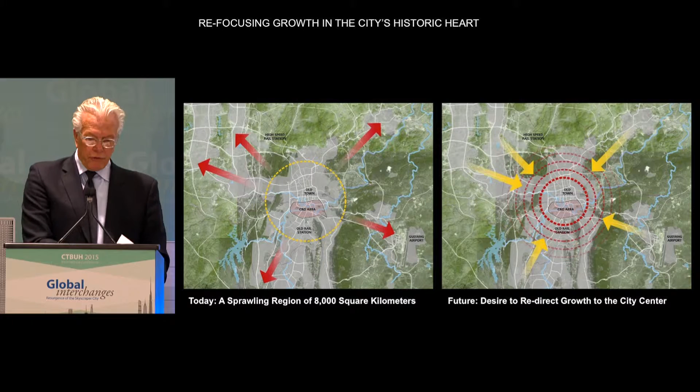As always, we start projects of this size with a set of shared principles as a guide for each decision, to measure success and for future planners that will come.

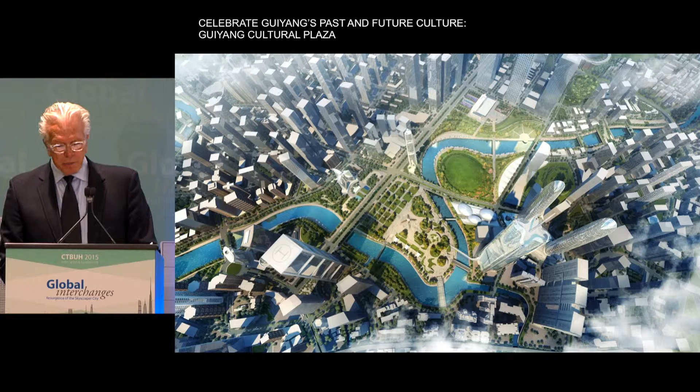The first principle we've used is to celebrate the culture of this place. Guiyang is rich with a cultural legacy that has been preserved for centuries. Our plan proposes to preserve those sites, but also to transform the city center into a cultural center. Across from the recently completed Party Plaza, you see here Cultural Plaza spanning the riverfront in which new iconic buildings have emerged, similar to what Greg has mentioned earlier, as well as the SOM Tower.

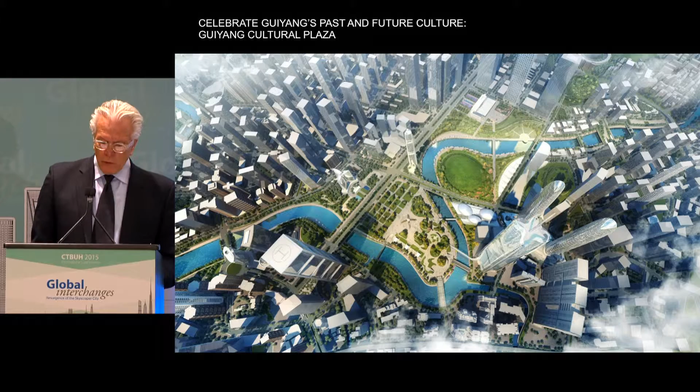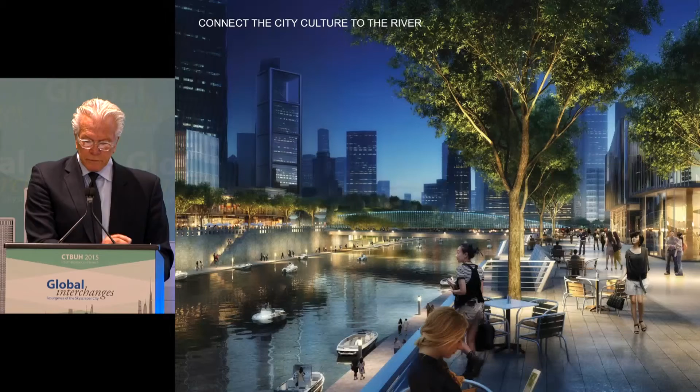Second, the plan must reconnect the city center to the Nanming River. Just as they have for centuries, rivers have a natural pull of people for spiritual refreshment as well as recreation. We also recognize the value the river adds to development. We've leveraged that inherent value to activate the core as a vibrant public place that defines the quality of life of the future.

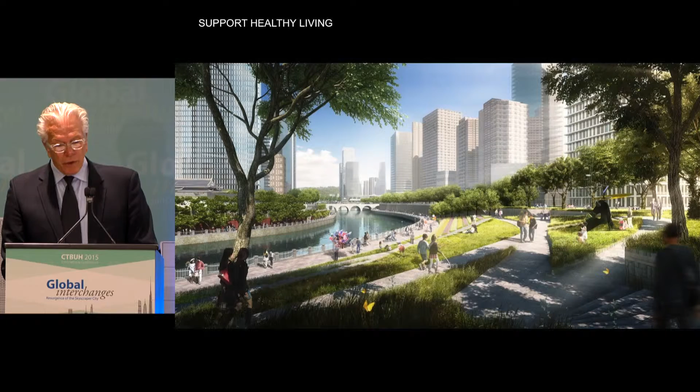Third, healthy living. The air in Guiyang is surprisingly clean and encourages an outdoor lifestyle. Historically, the city has been built around mountain remnants called karsts. They will be incorporated into a new open space system and embraced for their natural and cultural value. The river can also contribute to the healthy living goals by anchoring the parks and the circulation network and participating in the water cleansing goals.

Based on landscape urbanism principles, a robust open space network will serve as the armature for development and play a role in the city's placemaking. This system will ensure a more livable, healthy, and interesting city while supporting its ecosystems and natural processes.

The proposed open space system will be comprised of four major components: the riverfront, a network of new and existing parks, the karsts as cultural amenities, and a robust system of boulevards.

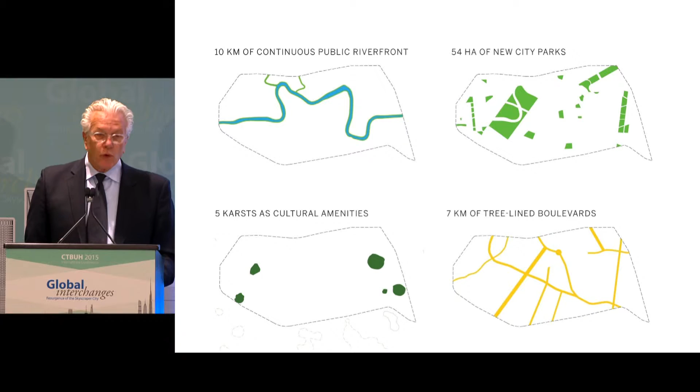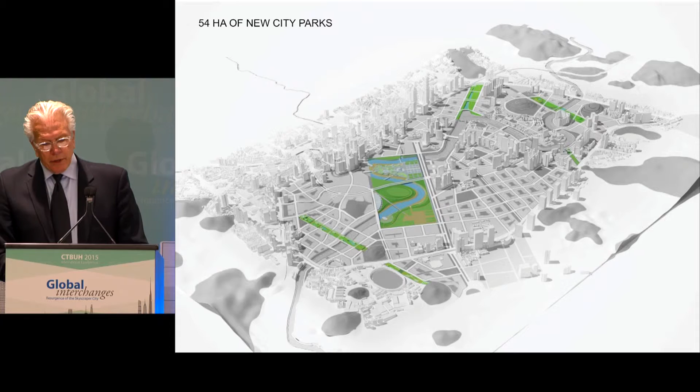The river becomes the city's connecting thread, its organizing armature around which other public spaces are arrayed. Here we see an example of this green and blue ribbon and its social, cultural draw and connectivity to other circulation systems and other open spaces.

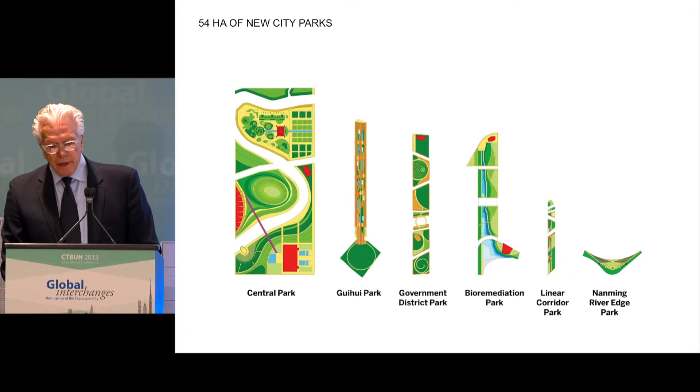A robust inventory of parks of every scale and type will enrich the city life and its environment and be the underpinnings of the future development plan. This is just a glimpse of the open space network's range of parks and potential for touching millions of daily lives.

Here we see the Cultural Plaza's Central Park as the city's centerpiece park on the river next to the People's Park.

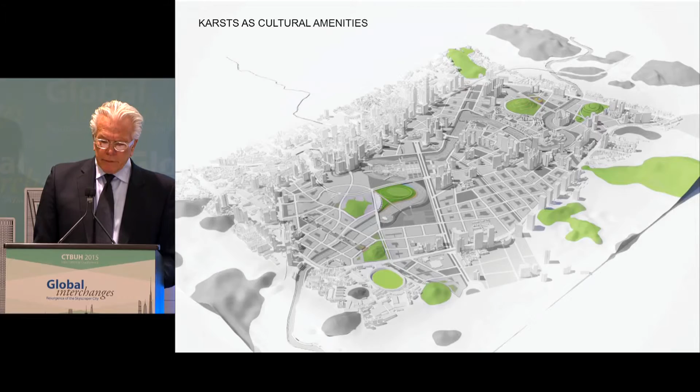Karsts have been integrated into the network and enlisted to offer an escape to the natural and elevated setting as a contrast to the more refined open spaces in the plan itself. They've also provided an inspiration for the landscape language of this new plan.

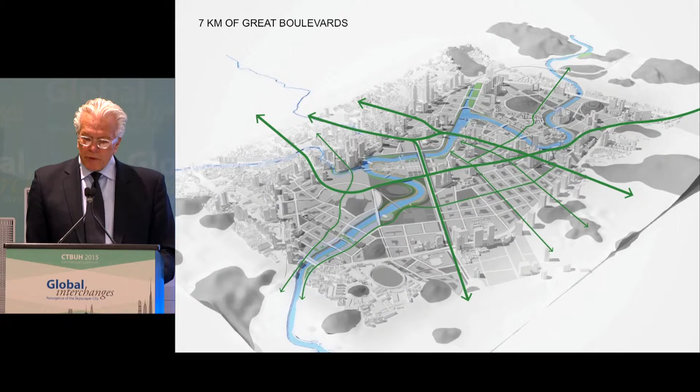Finally, socially and environmentally performative boulevards will connect all the neighborhoods and the districts to each other and to their parks.

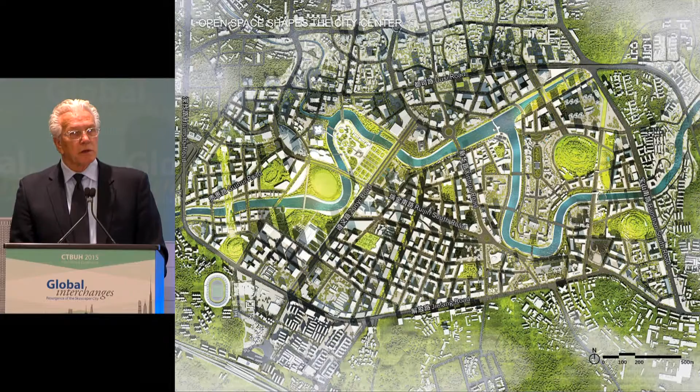Taken as a whole, we see this rich green fabric in which development, healthy living, heritage, and culture are in balance.

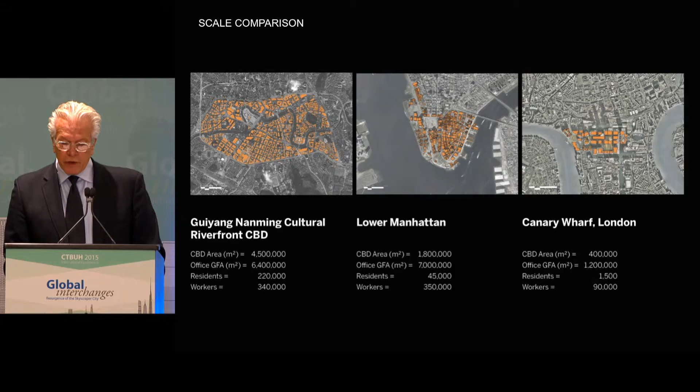Open space is an important framework for future development and the density of the city. The Guiyang CBD is planned to have very nearly the amount of office space found in Lower Manhattan, but of course in a much larger area, as you can see.

What that ultimately means is the plan is proposing to triple the size of the existing CBD in terms of a built-up area. Many older buildings will be replaced to make this happen.

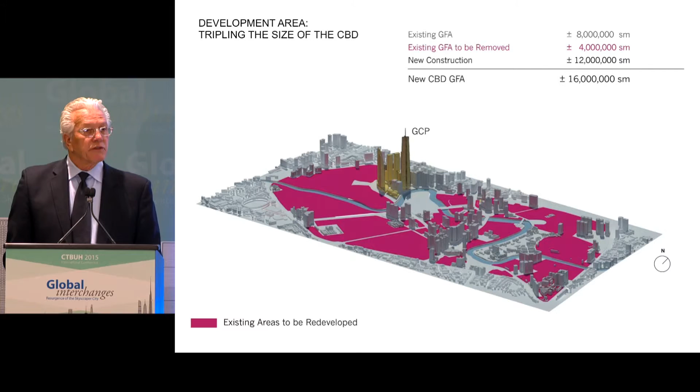This dramatic increase in density is balanced and supported by a corresponding increase in the amount of open space in the district, twice as much as exists today.

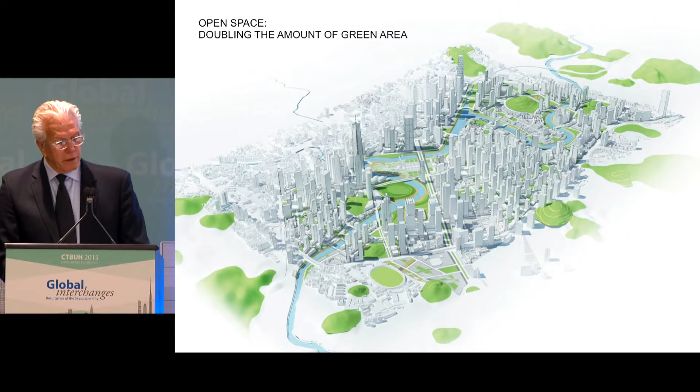It's focused around ideas about how development should occur, around transit, around a new city boulevard or main street, or around major new open spaces. Neighborhoods, each with access to amenities and schools, should be compact and walkable.

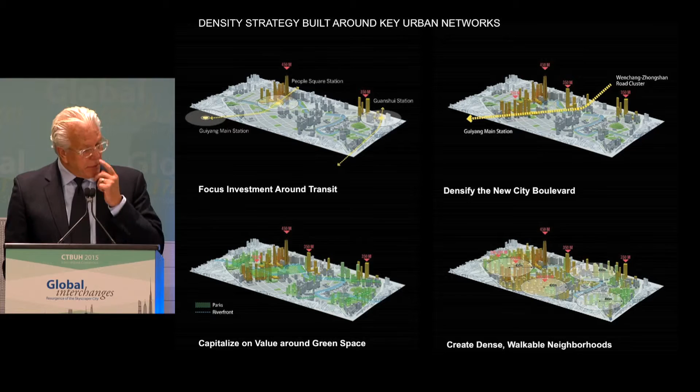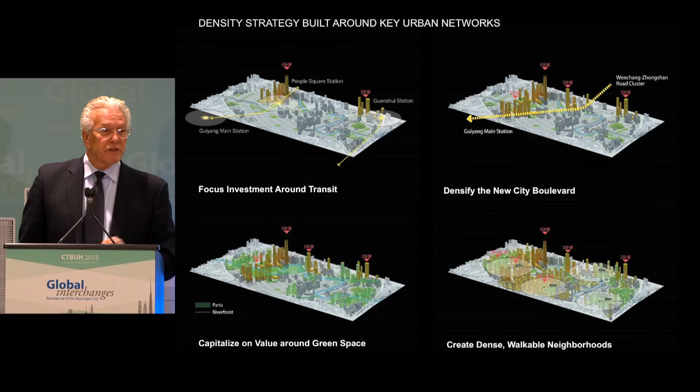These ideas pair major infrastructure investments with corresponding private development in a way that drives appropriate transit-oriented growth. Together, these strategies lead us to something that looks like this within the city district: amazing height and density, big park spaces and public riverfront, an active urban place, and real limits on how this development sprawls outward.

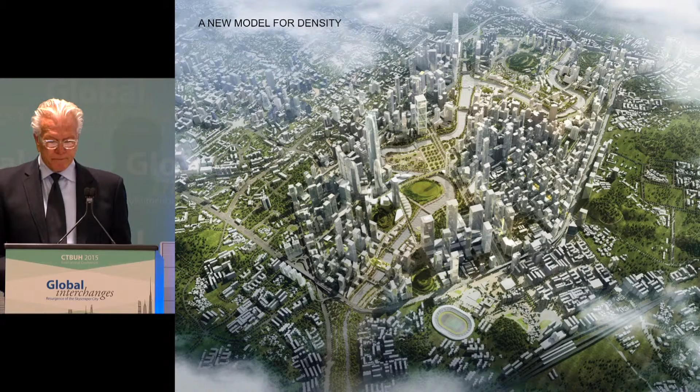We've given considerable thought to future-proofing this city, keeping in mind that the site has to balance forward-thinking environmental ideas in the context of an older city rich with culture.

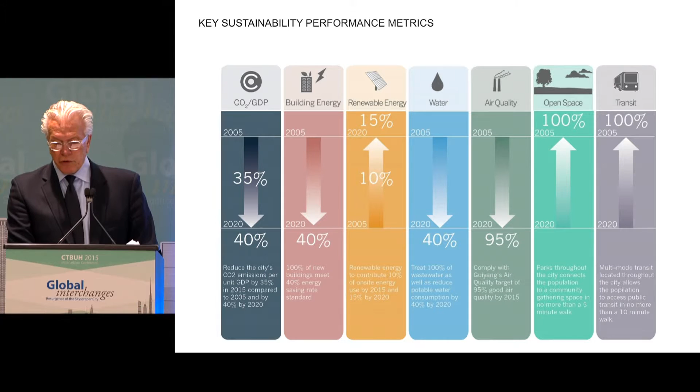As part of the 5-year plan, Guiyang has developed sustainability goals, which the plan has incorporated. The plan also proposes to go even further than those goals, as you can see from the graphic here.

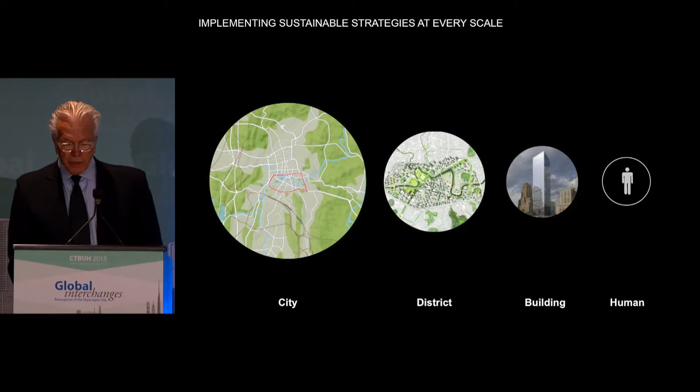Strategies to get there range from the city scale, densifying the core to avoid the negative consequences of sprawl, for example, or down through district-wide areas, building specific strategies, and ultimately to the people and the individual. We see sustainability as the interplay of all of these pieces for it to work in any way close to what we've described.

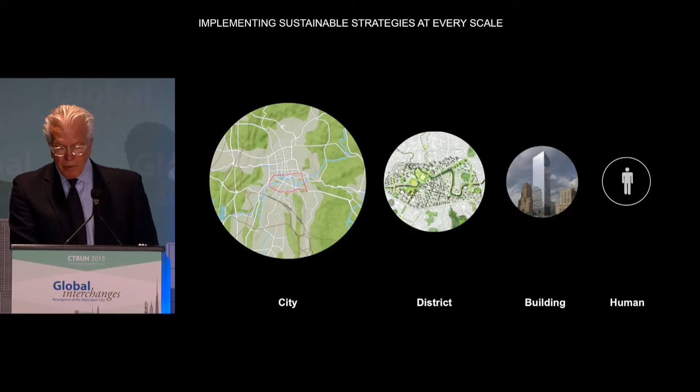Let's take water as one example. Water is both a local and regional problem with lots of interlocking issues. We propose to create a water district, district-wide, to conserve water, to deliver clean water back to the city, to mitigate against the potential flood risks the city faces, and to create public amenities along the way.

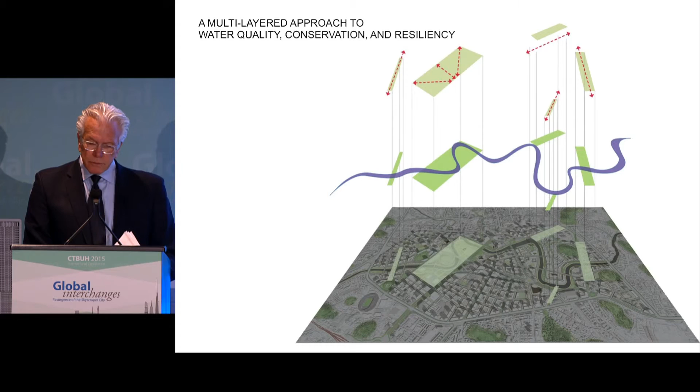A new system of stormwater management will be incorporated into all of the infrastructure and the architecture and the open space components of the plan.

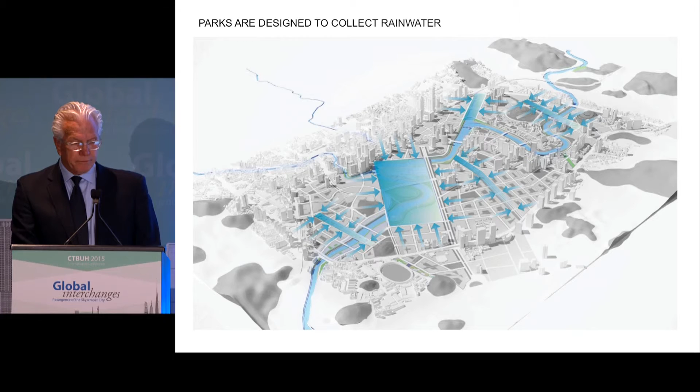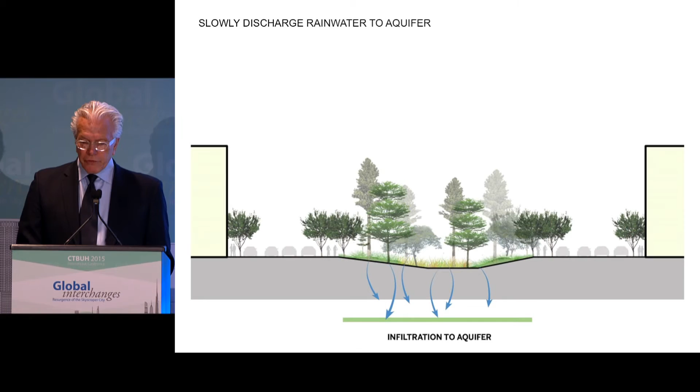Through bioremediation, parks and streets and boulevards will direct, retain, and filter this stormwater to the aquifers for recharging. Other water will be filtered before being discharged into the Nanming River.

As just one example, this integrated system of stormwater management will reveal its benefits on the surface in the form of recreation, interpretation, and a healthier city living.

In conclusion, let's keep in mind that hundreds of cities in China will experience tremendous growth over the next 15 years. Hundreds of cities like Guiyang, huge cities that we've never heard of, will literally be built in the next 15 years. The impact will depend on their ability to achieve sustainability and density in a manner responsible to the heritage and the future of China.

We believe this Guiyang Nanming Cultural Riverfront Plaza riverfront master plan will lead the way toward responsible urban growth in which density, nature, and culture are in balance. Thank you.